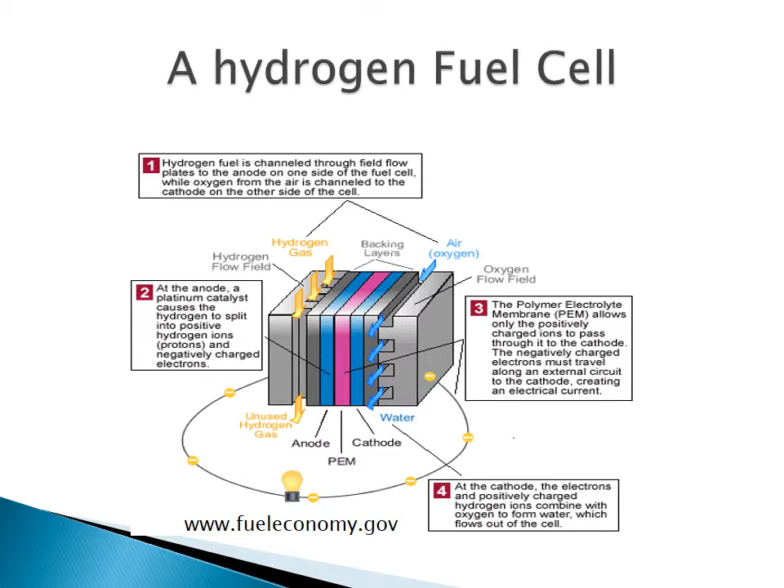Types of fuel cells. Alkaline fuel cell is made with compressed hydrogen and oxygen, where potassium hydroxide acts as an electrolyte. Alkaline fuel cell was first used on the Apollo spacecraft. This type of fuel cell can produce 300 watts to 5 kilowatts electric current.

Next one is molten carbonate fuel cells. Molten carbonate fuel cells are made of high temperature compound salts such as sodium or magnesium carbonate. Their operating temperature is 1200 degrees Fahrenheit and they can generate up to 2 megawatt current and their efficiency is about 60 to 80%.

Phosphoric acid fuel cell. Phosphoric acid fuel cells use phosphoric acid as the electrolyte and can produce 200 kilowatt to 11 megawatt electricity, and their efficiency is about 40 to 80%.

Most commonly used fuel cell is proton exchange membrane. It is generally used in the automobile industry because it can be operated at low temperature, and it produces 50 to 250 kilowatts electricity, and they use one kind of sheet. It's called permeable sheets, and this sheet kind of works as an electrolyte.

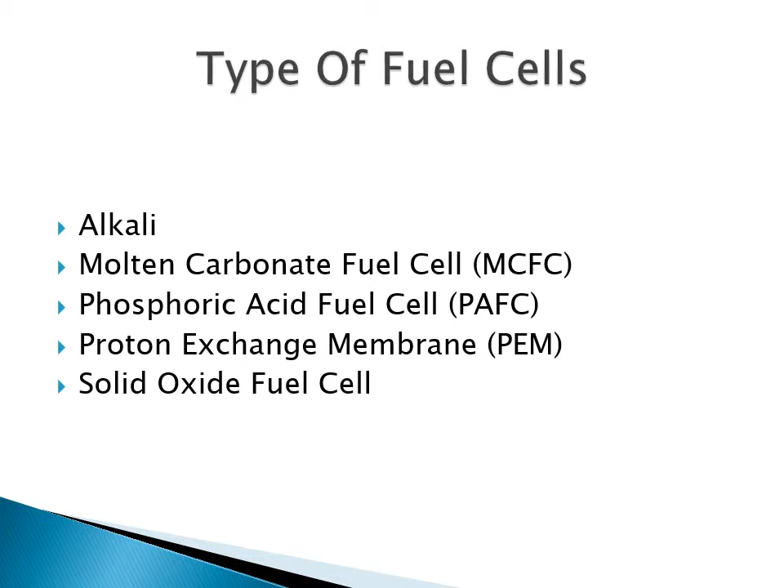Hydrogen as a fuel cell. President George Bush announced the Hydrogen Fuel Initiative program in 2003. Afterwards, the legislature passed the Energy Policy Act of 2005 that gave more funds to perform research on hydrogen cells.

It was considered that in 2020 there will be many hydrogen fuel cell operated vehicles on US roads. The US government spent $1 billion for research on hydrogen fuel cells and infrastructure.

Now I'm going to talk about the process of hydrogen gas production. Hydrogen is not available by itself. In nature, it combines with another element. Most of the hydrogen that can be utilized for fuel cells is available in either water form or hydrocarbon form. Hydrogen consists of a single electron and one proton.

The article Hydrogen Power Fuel Cell mentioned that when applying heat on the hydrocarbon, the hydrogen separates from the hydrocarbon. This process is known as reforming, and NASA first used liquid hydrogen as a fuel for the space shuttle and other rockets.

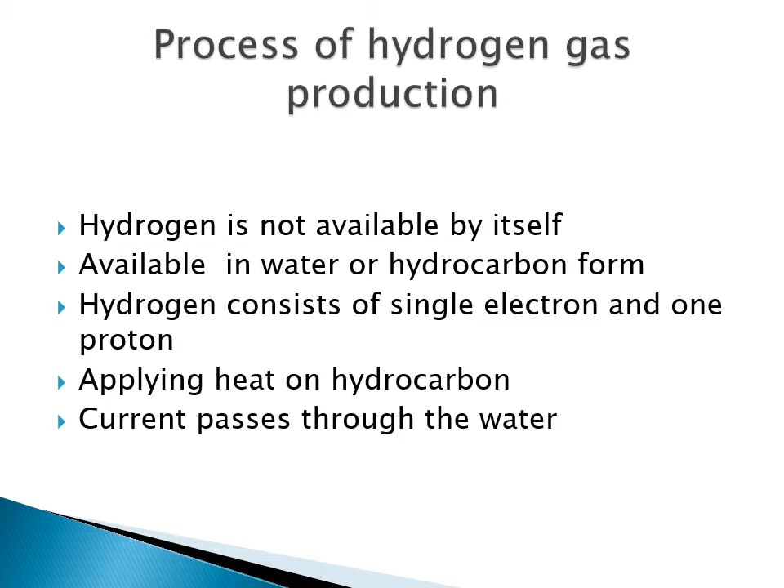The California government invested a lot of money for zero emission vehicles. FCVs are very expensive because of the cost of the vehicle itself and fuel cost. According to Drive Clean CA government, there are 13 hydrogen fuel stations in California and only 9 are for public uses. A lot of manufacturers such as Ford, GM, Honda, Nissan, Hyundai and Toyota already invest millions of dollars in FCEV development. They have planned to introduce fuel cell electric vehicles in 2015 and 2017.

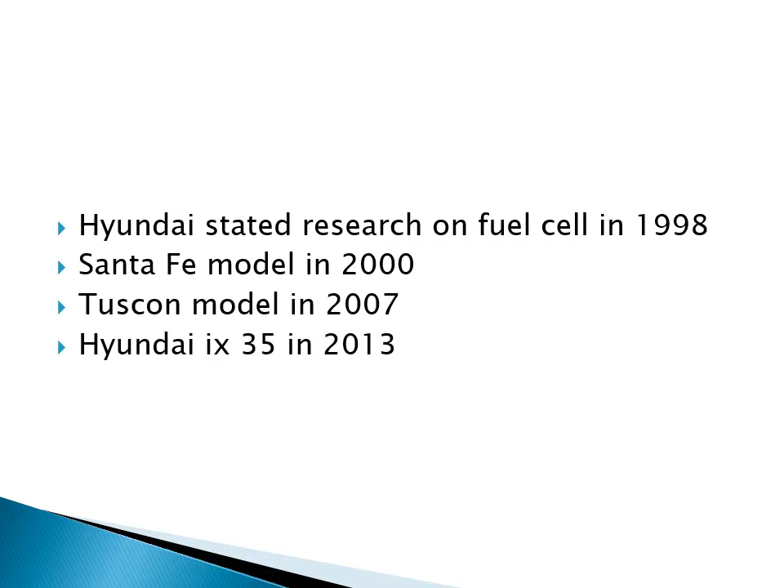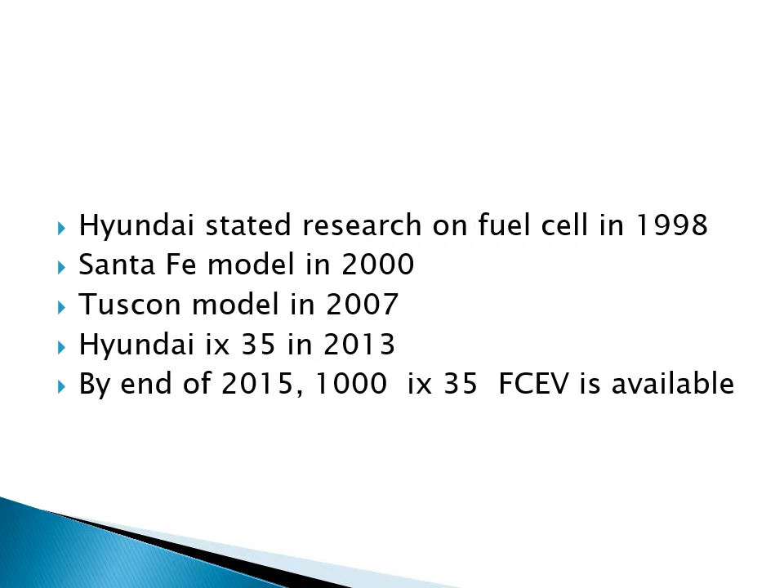Hyundai started research on fuel cell units in 1998. Their first fuel cell vehicle came out in 2000 as a Santa Fe model. The fuel cell that can operate a 100 kilowatt battery was introduced in the 2007 Tucson model with an operating range of 200 miles. Hyundai iX35 came out in 2013 and by end of 2015 they plan to manufacture a thousand iX35 models. This is the Hyundai iX35 fuel cell vehicle displayed at SAE World Congress 2014.

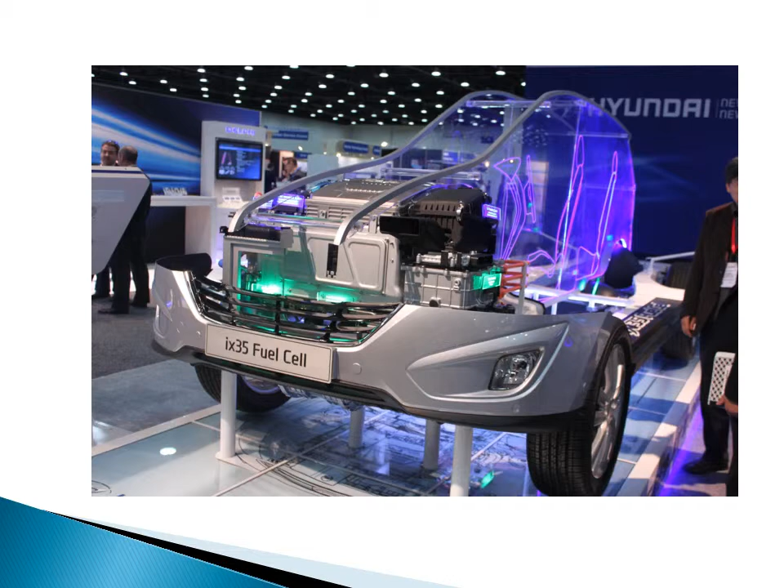Now I'm going to talk about the technology behind the fuel cell electric vehicle. A fuel cell electric vehicle consists of fuel cell stack management and processing, motor and reduction gear, inverter, battery and hydrogen tank. The fuel cell stack management and processing unit supplies hydrogen and oxygen into the fuel cell. This unit also works as the cooling system and releases water vapor as a byproduct. The function of the fuel stack is to generate electric power through the chemical reaction of hydrogen and oxygen. This electric power goes to the motor and reduction gear.

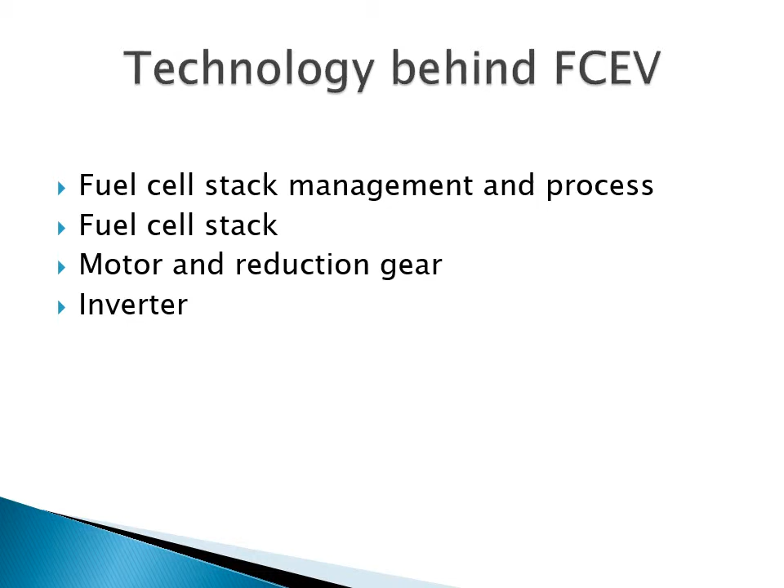The function of the motor and reduction gear is to convert electric power that is supplied by the fuel cell stack to mechanical power that drives the final driveshaft. Another function of the reduction gear is to control the torque. The inverter is used for converting high voltage that is produced from fuel cell stacks and battery. It is also used for converting alternating current. Fuel cell electric vehicles have a battery pack for starting up the vehicle and used for other onboard electric devices. It has at least one durable high pressure hydrogen tank for hydrogen gas storage.

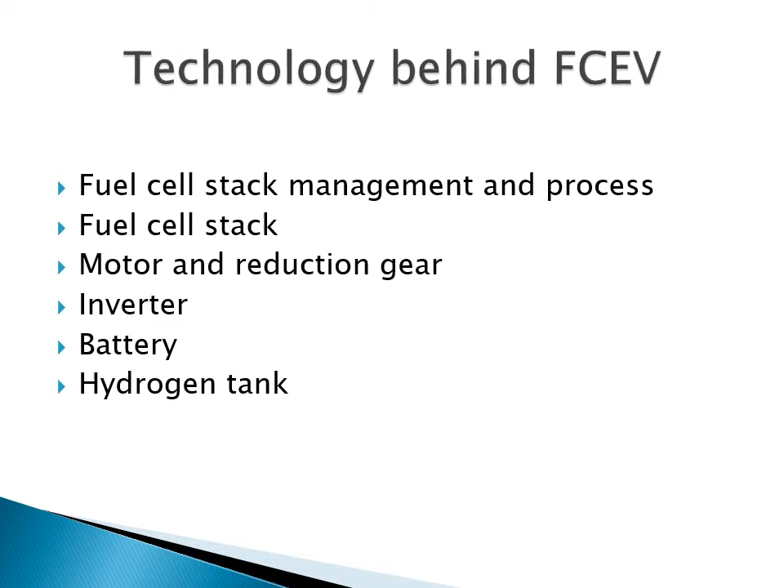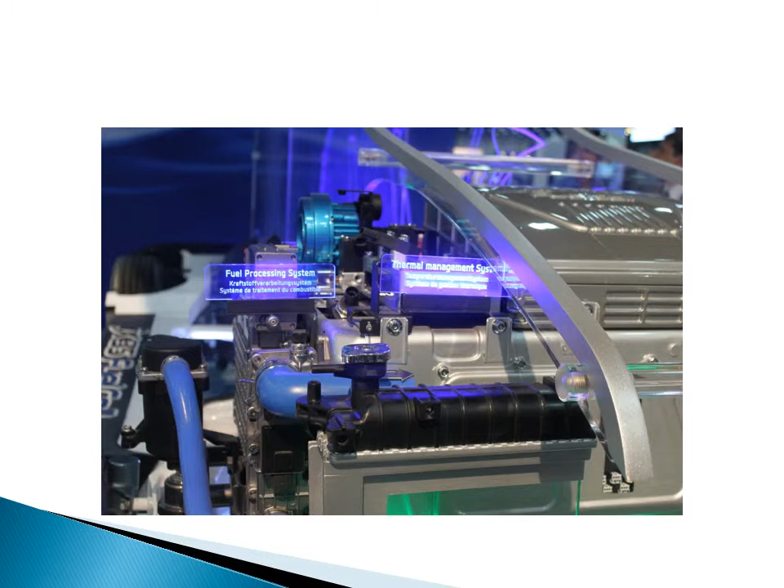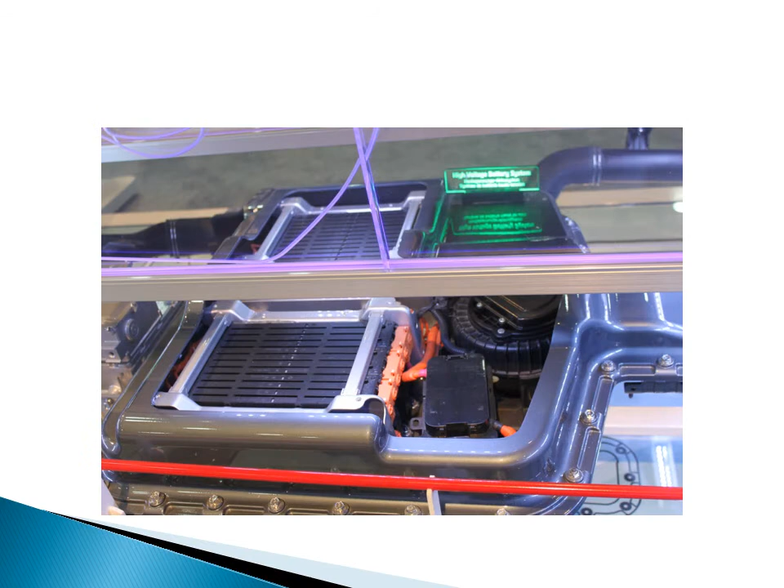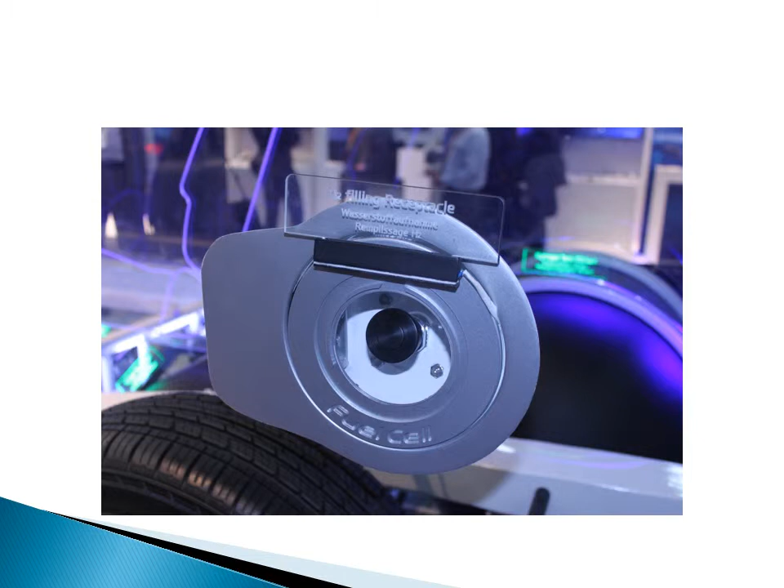Now I'm going to talk about why the fuel cell electric vehicle is considered our next generation vehicle. Fuel cell electric vehicles produce water as a byproduct, so it is known as a zero emission vehicle because it does not produce any harmful gas like carbon dioxide, carbon monoxide, NOx. Another advantage of the hydrogen fuel vehicle is it's considered a highly efficient vehicle with a very low amount of energy losses. The hydrogen fuel cell vehicle is about 45% efficient compared with diesel. The efficiency of diesel is about 33%, whereas gasoline has the lowest efficiency, about 15 to 20%.

Another advantage of the hydrogen-based fuel vehicle is it can be refueled very quickly. It takes only 3 minutes to complete refueling. However, an electric vehicle needs at least 30 minutes for charging if it is charging the rapid way. Normal charging time for the electric vehicle is about 6 hours. So that is the disadvantage of driving electric vehicles.

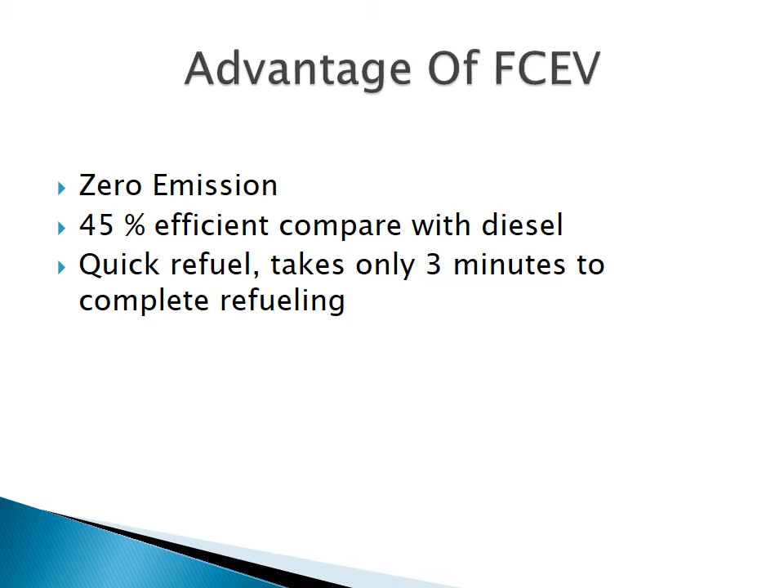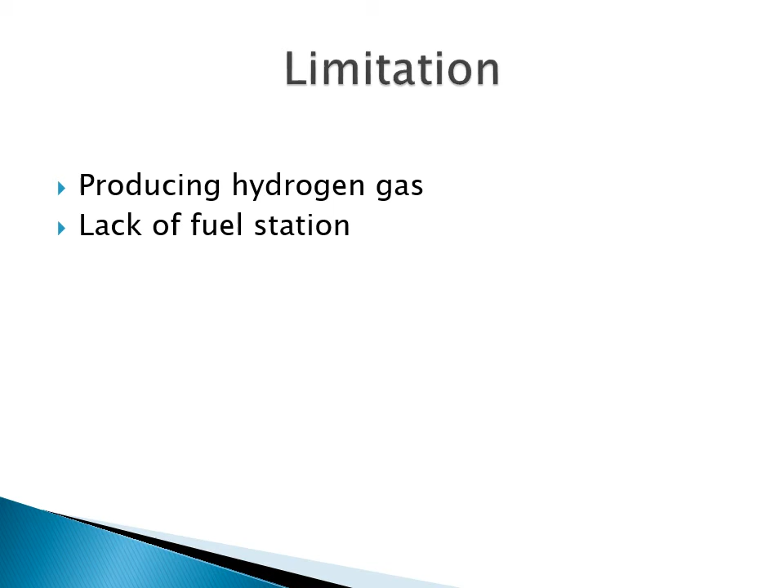The fuel cell electric vehicle is still an experimental vehicle, so there are some limitations for this technology. One of the major constraints for this technology is producing hydrogen gas. Because hydrogen is combined with other components, scientists have to develop technology to produce hydrogen gas in a more convenient way. Another limitation is the lack of fuel stations. Only some states have hydrogen gas filling stations. For example, California has only 13 operating hydrogen fueling stations and only 9 are for public use. Fuel cells contain sulfur and this sulfur is poisonous for the human body.

There is some misconception about the fuel cell electric vehicle because this type of vehicle is still experimental, so people don't have any knowledge about this technology. When this type of vehicle is available on the road for test purposes, people can know more about this technology.

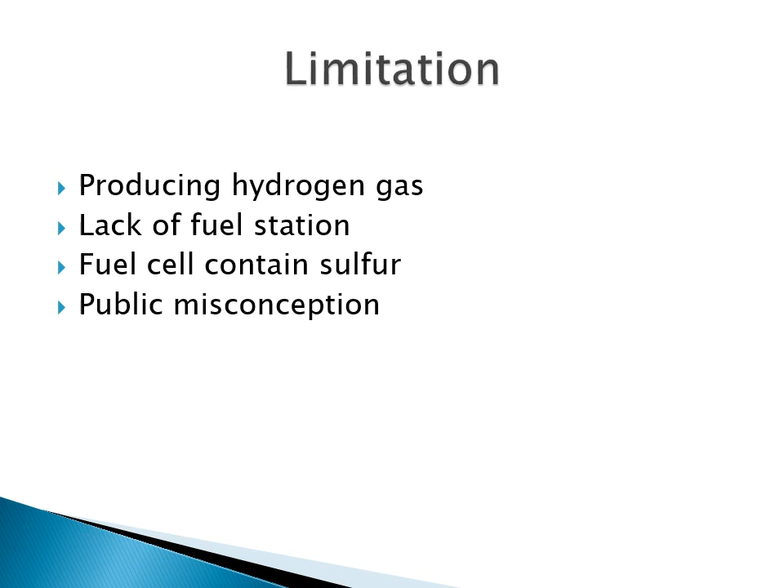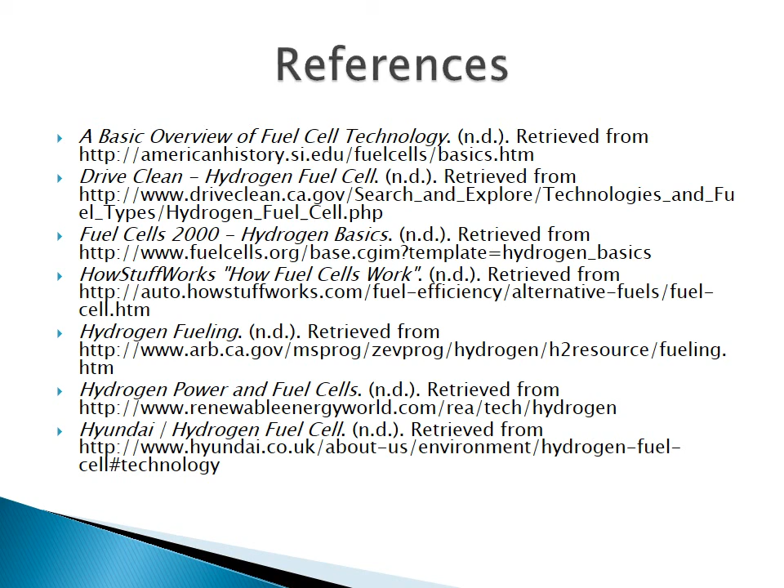In my conclusion, the hydrogen fuel cell vehicle is considered as a... In my presentation, I talked about the background of the fuel cell electric vehicle, types of fuel cells, processes of hydrogen gas production, development of the fuel cell electric vehicle, and what types of models are available on the road.